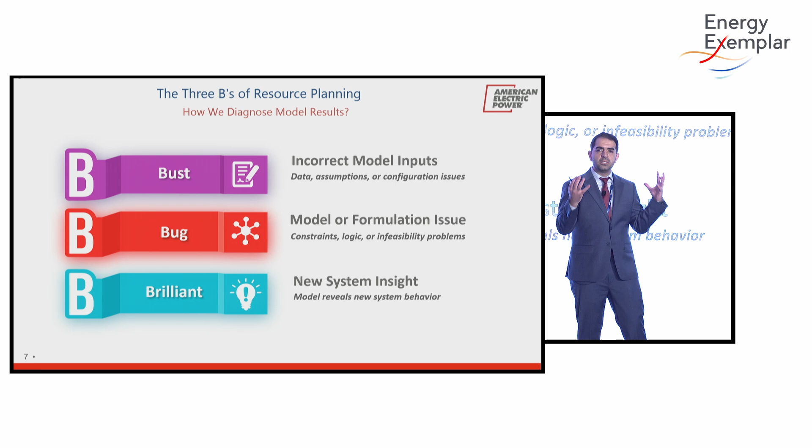Now with this combination of using the API and AI, we don't really treat the model like a black box anymore. We can have this deep understanding of what the model does and how it processes its transactions behind the scene, how the optimization actually happens behind the scene of the model.

So right now, as we have access and control over the model, the question remains: what problems are we actually solving for? What do we care about? In today's world, we have several components that impact the overall system behavior, and they're all interconnected—they don't move in a separate direction. They all actually impact each other.

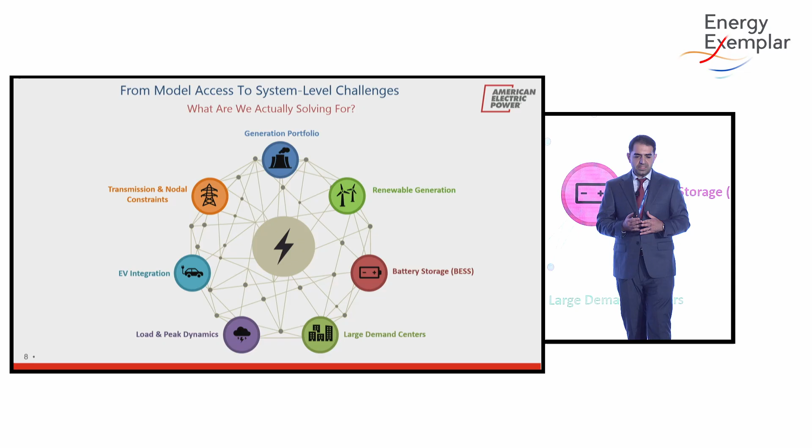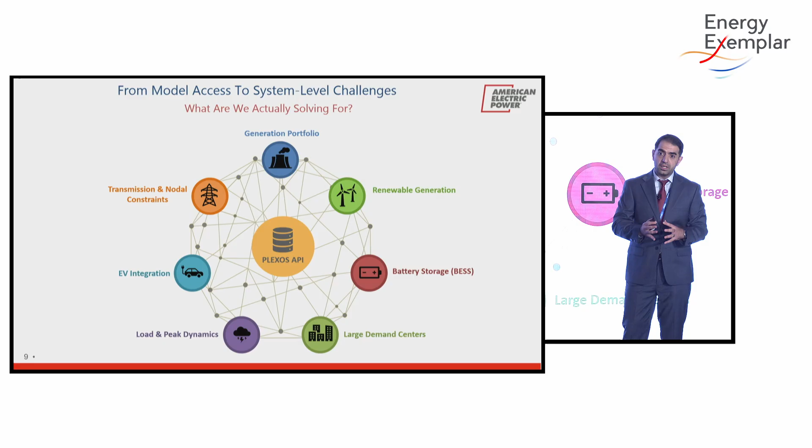As we can tell, renewable generation is growing so fast. We also see significant growth in large demand centers that is also driving load and peak dynamics. As we get access to the API in the middle of this cycle, we can get all these dots well connected. We can understand the full picture of the plan, how these small components are impacting each other and adding value for the overall system behavior. With the PLEXOS API, I call it a game changer because it helped me see the bigger picture and connect all the small dots together across the energy system.

For a very long time in our industry, our planning used to be driven by a single objective: what is the lowest cost possible? We used to care so much about identifying the lowest cost in our plan.

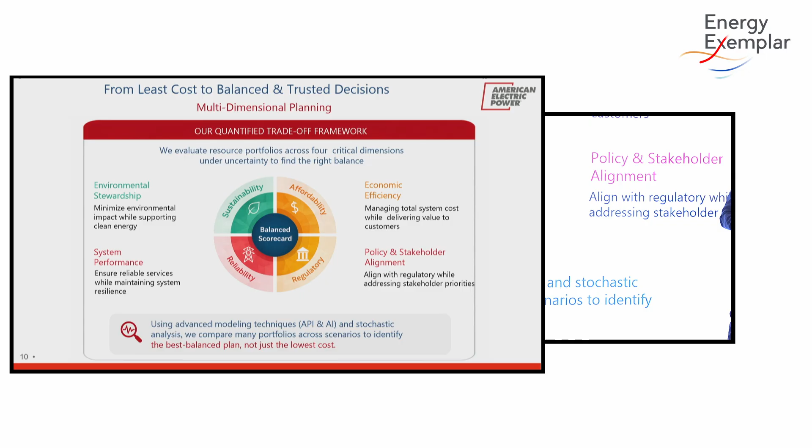However, in today's world, every decision we make is actually driven by 4 key priorities: reliability, sustainability, affordability, and regulatory. So we're trying to identify a plan that is energy reliable, economically reasonable, regulatory compliant, and also resilient.

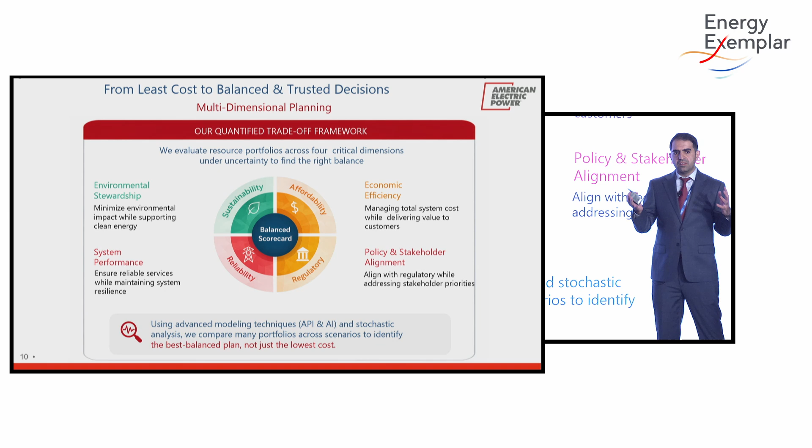As we employ advanced modeling techniques—API, AI, and stochastic analysis—we can compare many portfolios across different scenarios to identify the best balanced plan, not just the lowest cost plan. We're trying to balance these 4 key priorities and identify a plan that gives us a well-balanced decision across all these competing priorities.

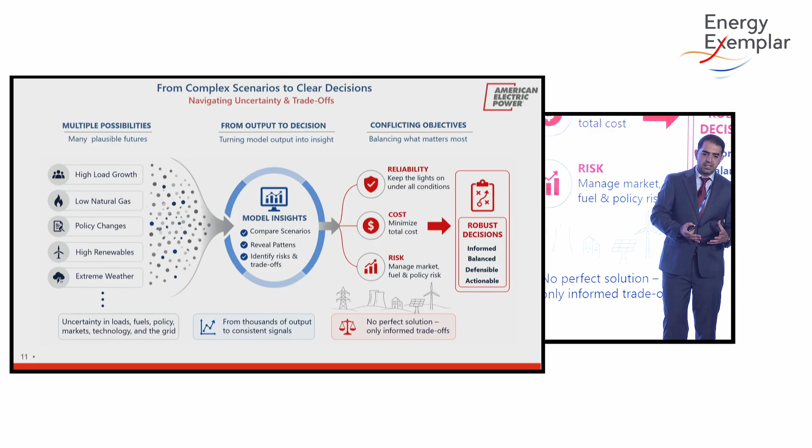As we care about many things—not just the economics and the cost—that means we're going to produce many plausible futures. We could have high load growth or low natural gas, policy changes could impact our scenarios, high renewables, and sometimes extreme weather events, as everybody has seen before.

Now, the value of modeling isn't just producing more outputs—it's turning thousands of outputs into signals. That includes comparing scenarios, revealing patterns, identifying risk and trade-offs. That's where the AI becomes really helpful, because we're trying to compare many scenarios and see how they're competing with each other as we balance the trade-offs. That's where the complexity of decision-making comes from.

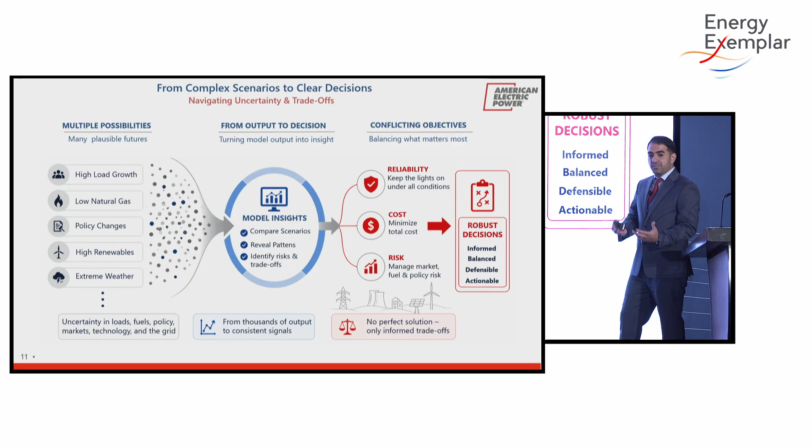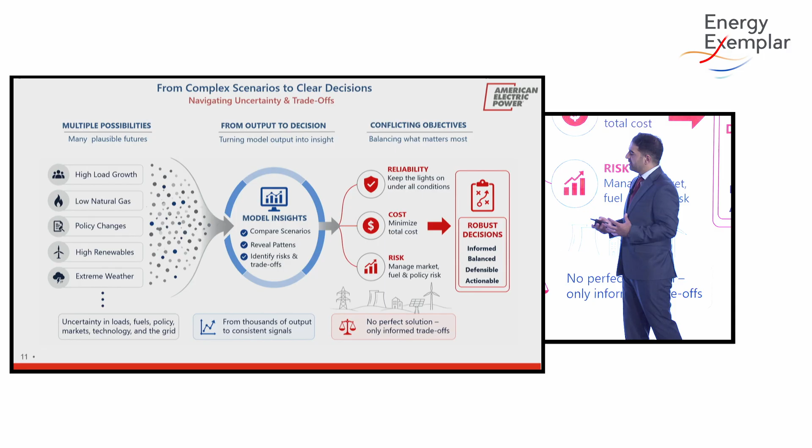Sometimes we may have a portfolio that looks great on cost but has a reliability risk, or another portfolio that looks good in reliability but is too expensive. So we're trying to identify a plan that is informed, balanced, defensible, and actionable. That's what I believe advanced energy modeling can do—turn complex scenarios into clear decisions. We're trying to employ and implement these tools to get down to this final image here.

So everything I talked about so far about API, automation, and AI analytics, I believe would actually change the way we interact with PLEXOS. I believe now we will have a better understanding of PLEXOS, not just running simulations. We will actually analyze the uncertainties around the model better. And basically the AI will play here as the bridge.

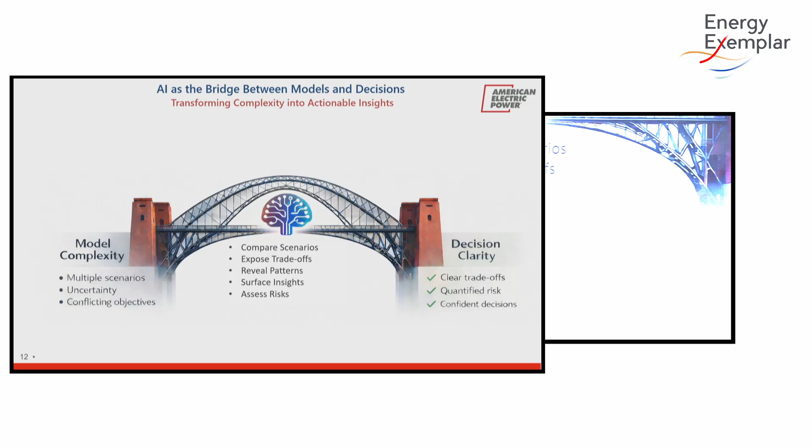The AI will not replace the model. The AI will play here as the bridge to bridge the gap between the model complexity and decision clarity.

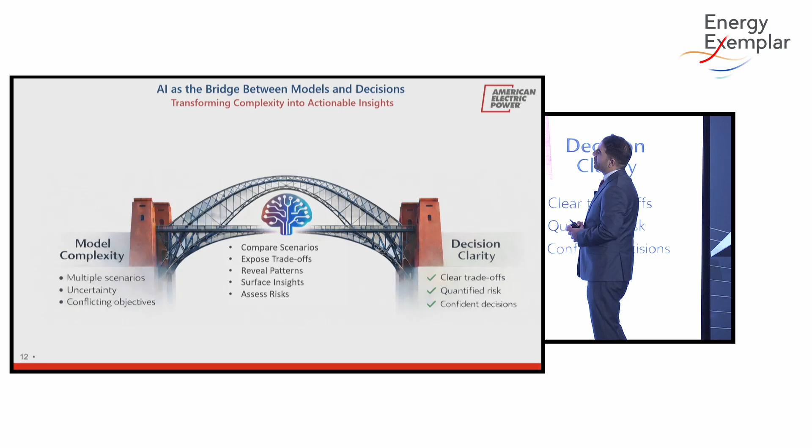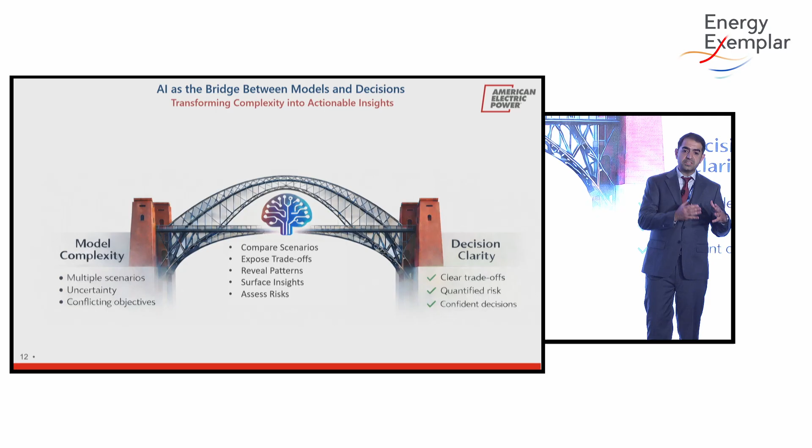And what I told you about today is actually part of the story. This is not all of the story. And what AI will do tomorrow is something could be different from what it can do today. But if we can understand what the AI is doing today, we can understand what the AI is capable of doing tomorrow. So I would encourage you guys to stay curious and to stay open-minded about applying many of these advanced energy modeling techniques and how we can leverage AI to help with that.

So right now, I would like to show you 3 real-world applications that we have actually developed at American Electric Power using this unique combination between PLEXOS API and AI-driven analytics.

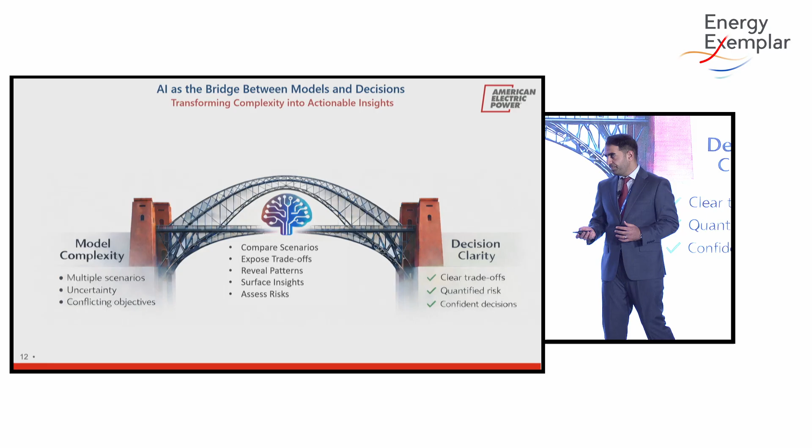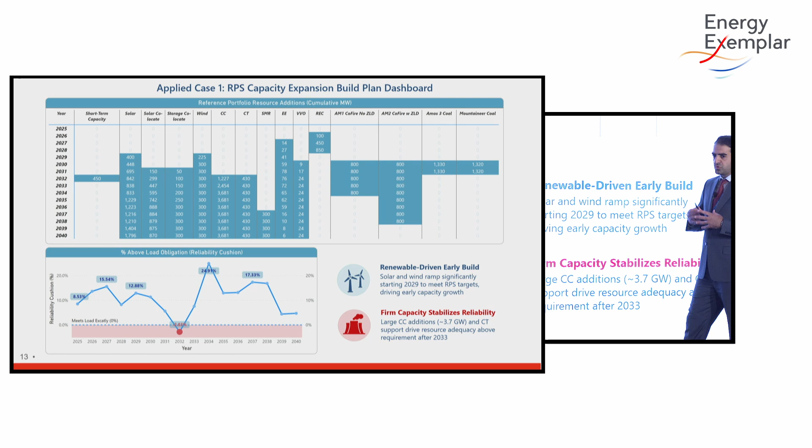So with our renewable portfolio standard resource adequacy, we were actually trying to plan toward the goal that is basically asked by our regulators to be fully renewable by 2045. But we did not know what the preferred plan should look like. We had to run multiple plans. The plan I show you right here is only the preferred plan. But behind the scene of that, we had many data to process and many plans to compare against.

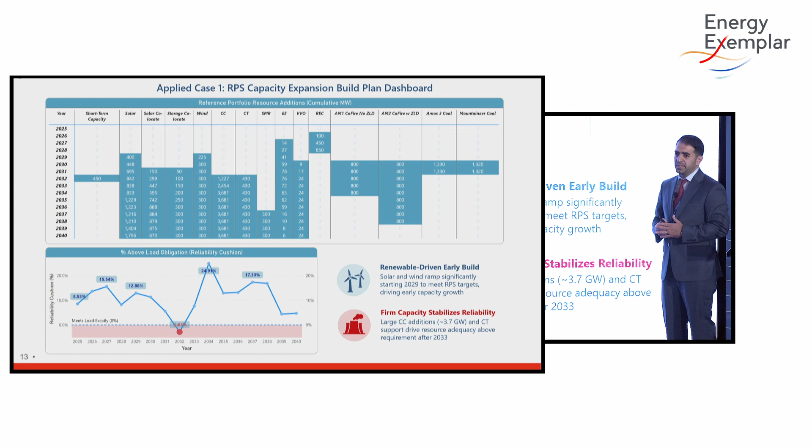So with this preferred plan, we were able to notice that we're investing in about 3 gigawatts of renewable resources for the next few years, especially at the beginning of our plan. And we're also adding some large CC and CT, about 3.7 gigawatts, supporting drive resource adequacy and above requirement after 2033. So now we can see the full story, actually.

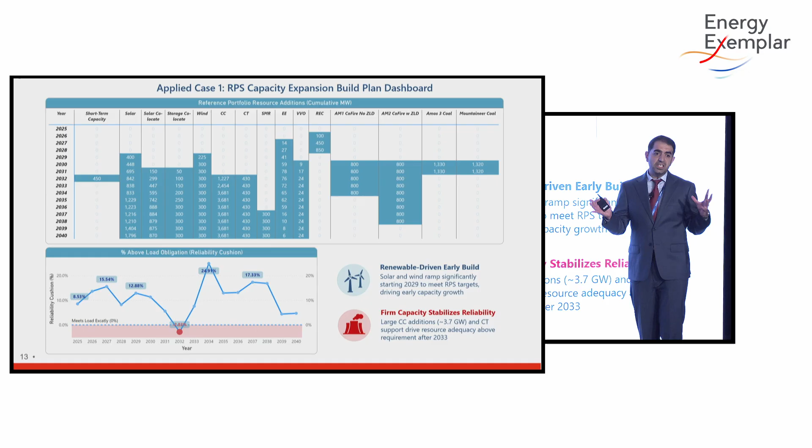We can see how we're doing against that target that we're asked to achieve, and how we're doing in terms of our reserve margin. As we look toward the future for the next 15 years, we can tell that only in 2032 we're a little bit below the reserve margin, below the reliability cushion that we have to achieve. And we can see in some other years that we're actually way above.

So right now with this dashboard, we can truly see the full story and better understand what the model is actually telling us and be able to communicate those results with our stakeholders really easily.

So the other applied case that I would like to mention right now is we were actually planning a study for one of our operating companies that they were actually investing in dual fuel capable. But the main challenge was in the first few years, the firm gas would not be available, and the system has to rely only on oil.

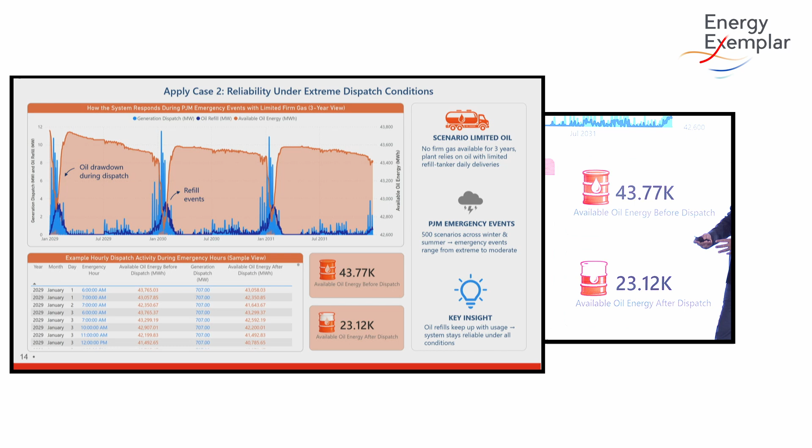So we had an oil tank available on site, and we had to plan with these basically unique constraints in the model. And also we had to run this stochastically with 500 scenarios across winter and summer for emergency events, ranging from very extreme to less extreme.

And finally, we did land to our insight. But before I tell you about the insight, I want to tell you a little bit about the value of the tools we have implemented in this study, basically.

So we had a lot of data we had to process. We were actually doing a production cost model for an hourly detailed study for 3 years, hourly. And then as we did that for 500 samples, now you can imagine how big this data is. We did not know whether this system is reliable enough, or this system may be reliable but has a higher risk. There were so many questions we were being asked to answer, but it would have been so hard to land on those answers without using advanced technologies like the one we had right here.

So toward the end of the study, we were able to summarize all the data that came from PLEXOS into this clear dashboard, as you can see right here.

As we dispatch during emergency events, oil will go down. As you can see, the orange will go down. And then we had to rely on some oil tankers to come in and refill the oil tank on site, so we're also incorporating that into the dashboard. As you can see, the dark blue color is showing the refill events. And then you can see this orange line sitting on top of all the blue, dark blue, and light blue lines, where it means the oil tank is reliable.

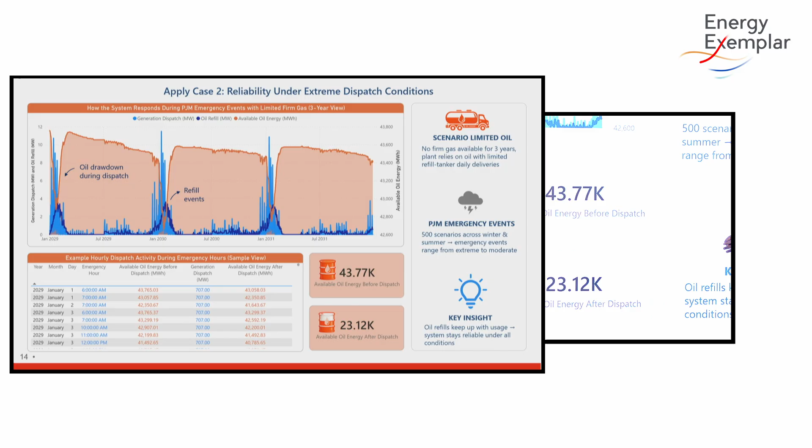And we were able to tell our stakeholders right away: look, this is the story of your system, given the fact you don't have firm gas for the first 3 years, and you're going to be relying only on oil, with refilling oil coming along. So we were able to tell them right away how things would look for the next 3 years of the plant system. And basically, we had this detailed table down here that shows them the real transactions that PLEXOS was optimizing. So that applies to case number 2.

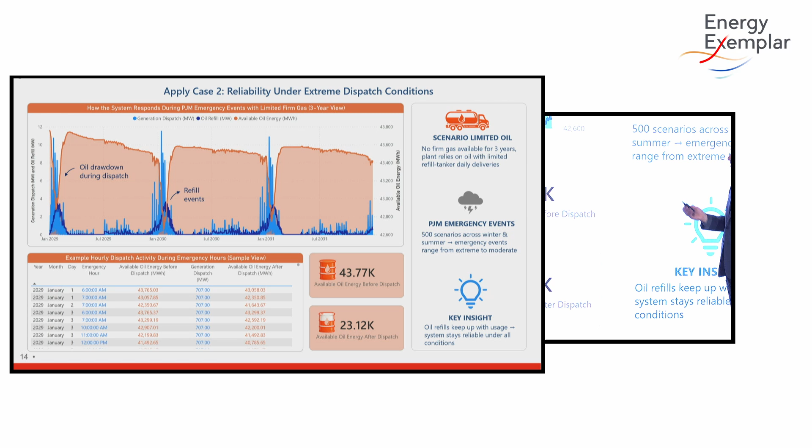With applied case number 3, which is actually the most interesting one, typically we do find infeasibility in the model. That's the bug I was mentioning earlier. So a bug in the model could indicate that we have some infeasibility. But the challenge always is, where is that infeasibility coming from? Or sometimes the infeasibility is quite healthy, it could be a good infeasibility, but we cannot tell whether it's good or bad unless we pinpoint the reason, the root cause of the infeasibility.

So we also developed, using AI and API-driven analytics, a solution that can identify the infeasibility. It was just like this: we had 15 million PLEXOS optimized transactions. Out of that 15 million optimized transactions, only 800 of them were infeasible. We did not know how many there were, I got to find this number through this combination of API and AI. But actually, we had only 800, so you can imagine, less than 1%.

Sometimes people might even ignore that less than 1% infeasibility, but that less than 1% infeasibility was so crucial to the system. And actually, we were able to identify the root cause of that infeasibility and tell where it's actually coming from. So using the AI and API engine was such a game changer to come up with this solution that can identify the infeasibility and tell where it's coming from.